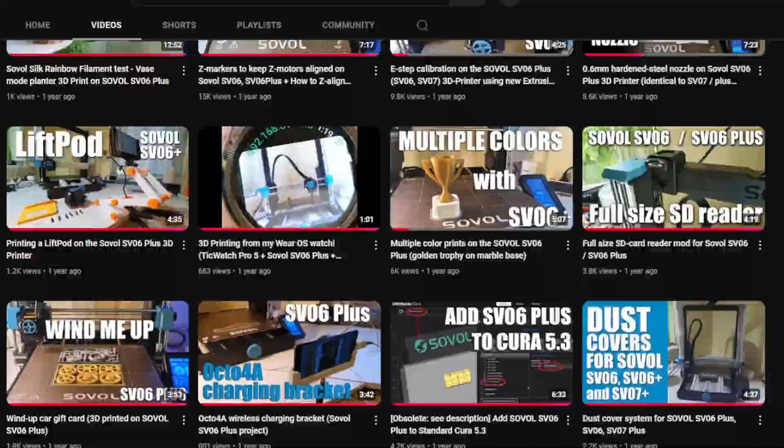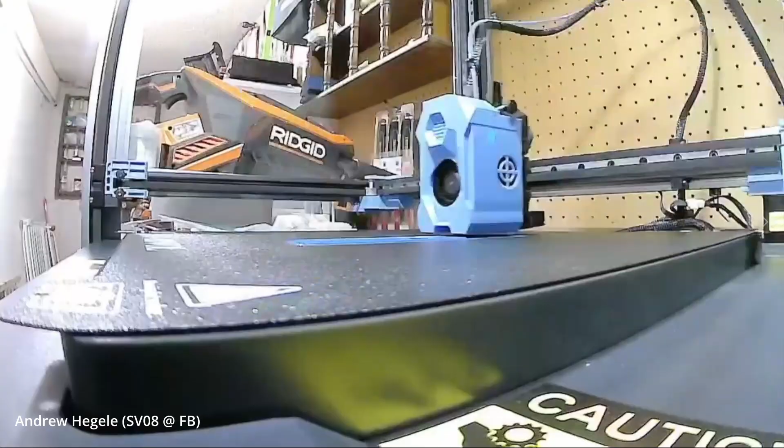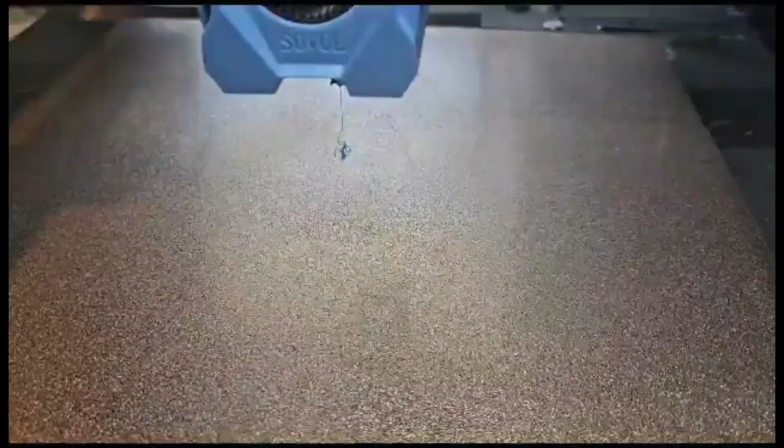Now, about the topic at hand. Recently, there have been reports of breaking nozzles on the SV08. While these seem to be isolated incidents, it's understandable to be concerned, especially if you're still waiting for your SV08 to be delivered. As far as I can recollect, the first reports of nozzle issues appeared in early mid-June.

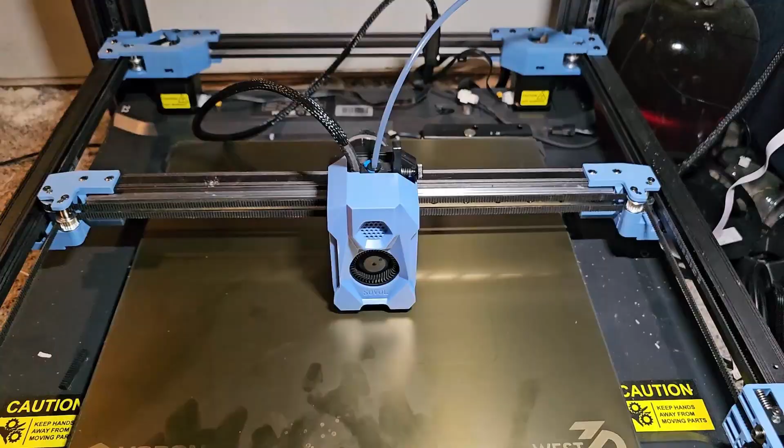From these reports, it seems, due to the pressure conditions inside the nozzle, the two parts of the press-fit SV08 nozzles came apart, separated, causing the nozzle to protrude more and eventually fall out. If this happened near the build plate in the beginning of a print, this protruding nozzle could scratch it up and ruin the PEI coating.

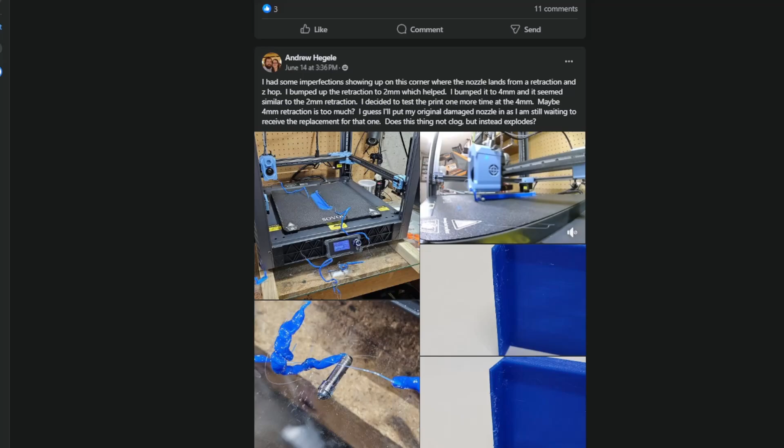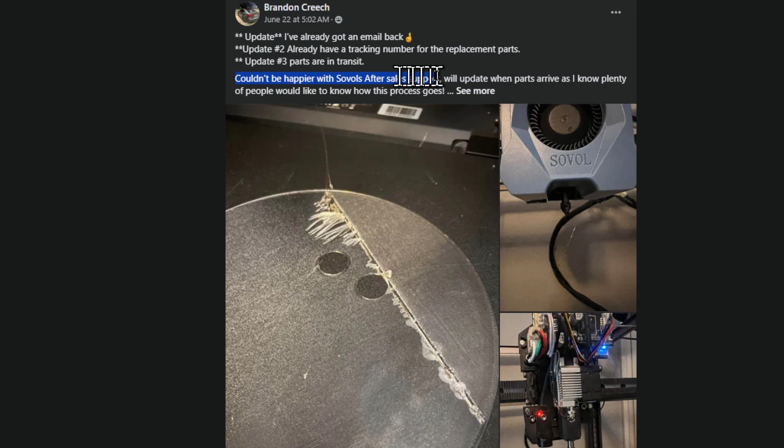The issue, understandably, gained much attention from a YouTube video showing the nozzle being pushed out. This user created several videos about the problem, but it remains the only case I found on YouTube. There were a few mentions of similar issues in the Sovol SV08 Facebook group, notably from Andrew Hegele, Sean Kelly, Brandon Creech, Levi Kovac, and Jay Sun. According to Brandon's post, Sovol responded quickly, committing to replace the damaged nozzles and beds.

Sovol quickly issued a public statement. We have received feedback on the SV08 nozzle PETG issue lately. The problem is not related to the design, but to our nozzle supplier's quality manufacturing and control. So it seems they don't plan to update the design in any way. For customers who have already encountered problems, we will reissue the nozzle for free. If the build plate gets scratched, we will also reissue the build plate for free.

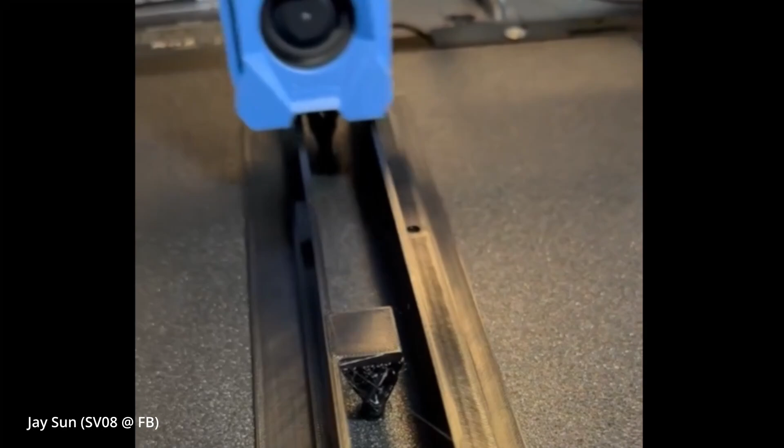So, yet another reason to wait patiently for your pre-ordered SV08. You might get a better tested, possibly updated printer if you get it a bit later rather than sooner. The common factor seems to be printing PETG. It's speculated that the higher viscosity of PETG causes some defective nozzles to separate. Some users went as far as not recommending printing PETG on the SV08 until the new batch of nozzles becomes available. However, many users still report successful PETG prints, and Darren Wynn's poll confirmed that most SV08 units are free from this defect.

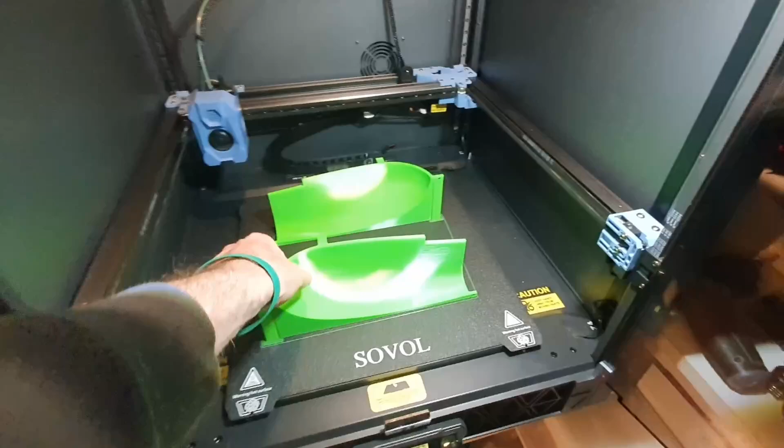PETG being my favorite material to print on all my printers, I've printed a lot of it on my SV08 too, including some more race car parts recently, a relatively large print, this time out of PETG, the top hat of the enclosure, and various other projects.

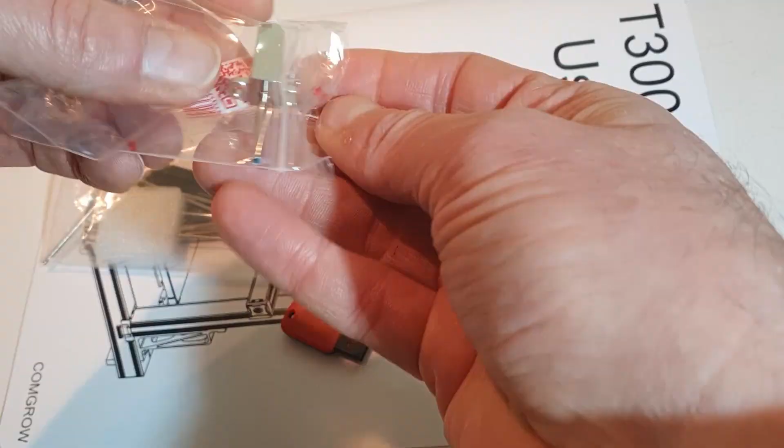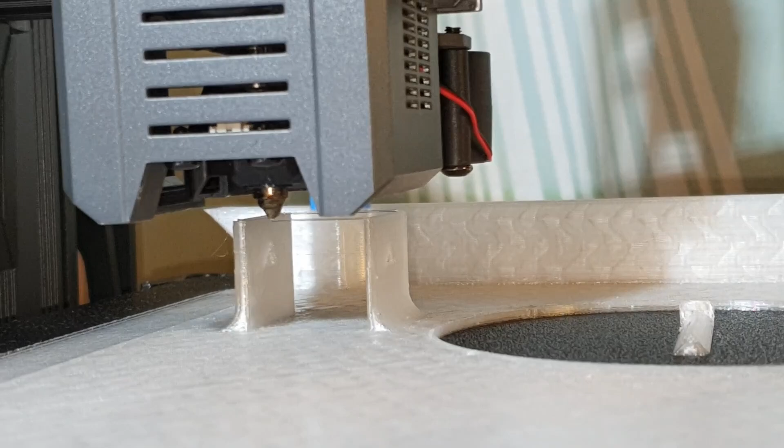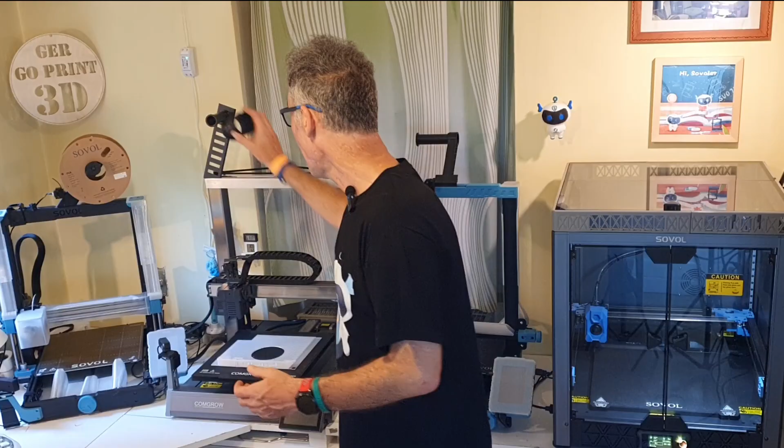The Comgrow T300, from the same company, they have merged, was the first printer to use this new nozzle. I've had it since early this year and have printed PETG parts including the bottom cover, articulated toys, and a spool holder mod I've designed to reduce friction for cardboard spools, all from PETG. The spool holder mod in particular greatly profits from being made of PETG.

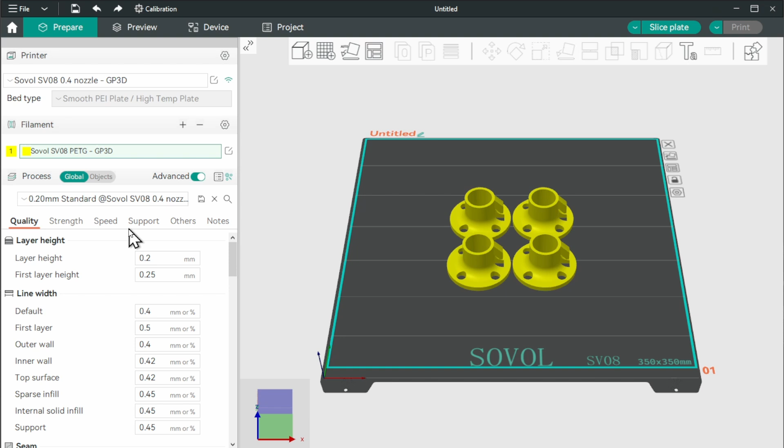So here are my presets in Orca Slicer for printing PETG on both of my printers with this nozzle. I think the key is the filament settings. I print PETG at 235 Celsius with the first layer at 240.

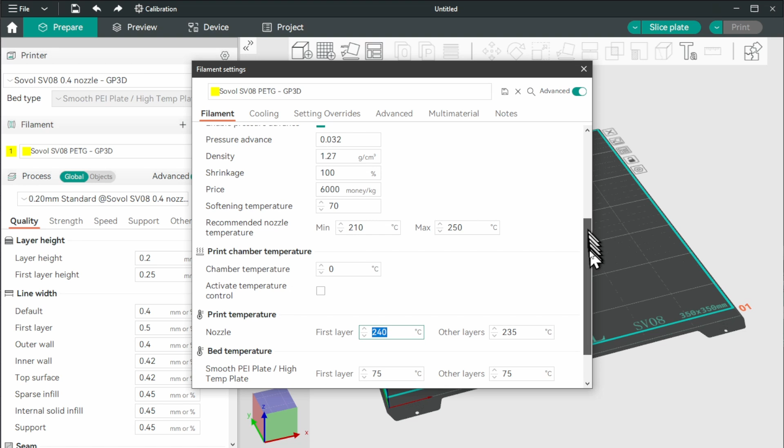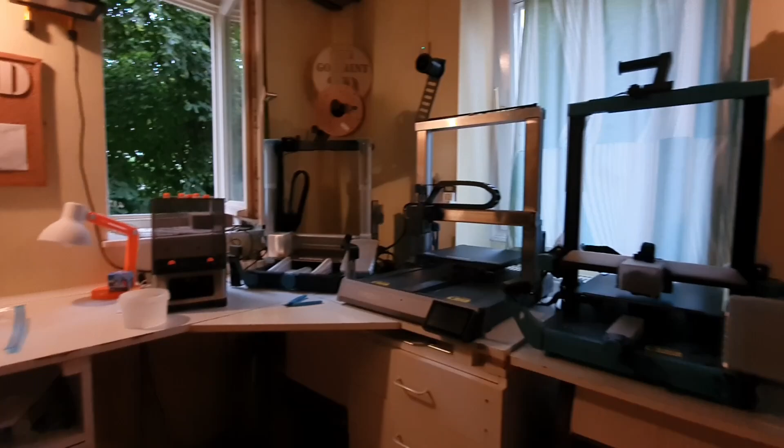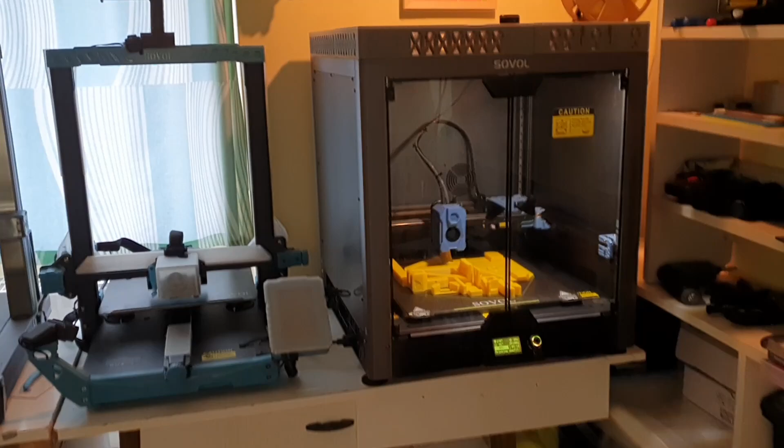I don't think, however, that the issue is related to the higher nozzle temperature. Since getting the enclosure, I've printed ABS as well, which requires significantly higher nozzle temps over 270, 280 C, and yet I haven't experienced any trouble with that either.

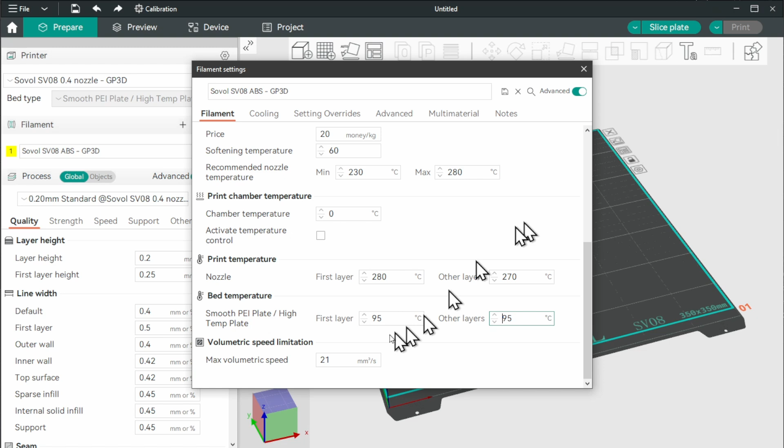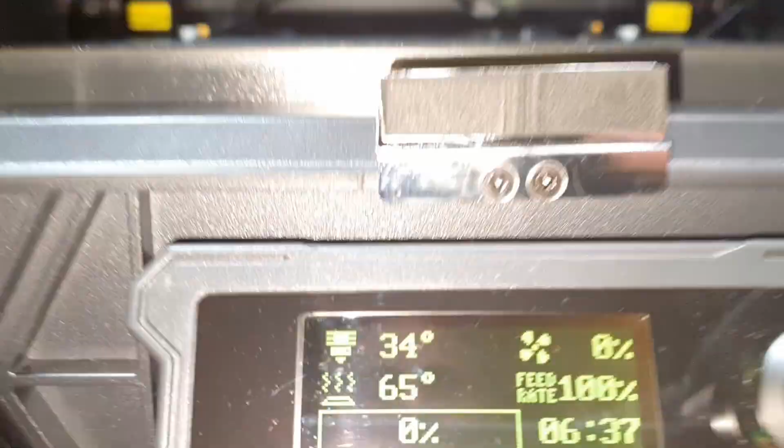I found an unrelated problem, however, with the stock Sovol presets for higher temperature filaments. These require higher bed temperatures, 75 degrees Celsius for PETG and 95 Celsius for ABS. This is a software issue. I noticed the stock start print macro still did QGL and adaptive mesh at the default 65 degrees, which doesn't make sense since print beds work differently at different temperatures. Preprint calibration procedures should always be carried out at the actual print temperatures.

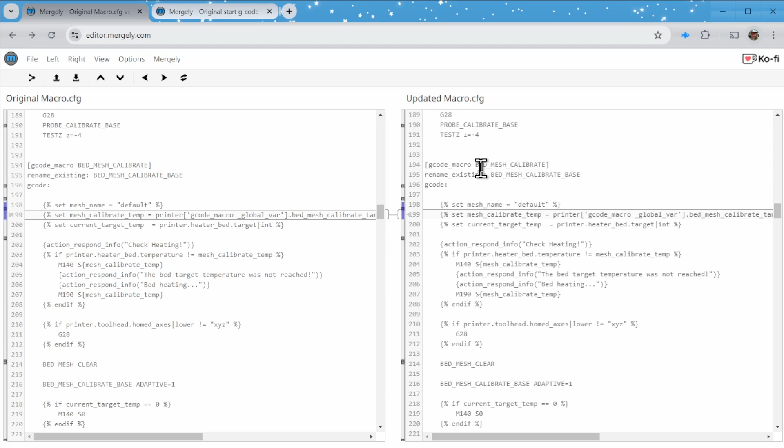To fix this, we just need to change a few lines in macro CFG, adding the condition if printer.heater_bed.target is less than 10, so it's not being heated, else printer.heater_bed.target | int. And add this condition to the macros in quad gantry level, probe calibrate, bed mesh calibrate, and start print. Here you can see I'm inserting this condition to the line setting the bed temperature. I've recommended something similar for the T300 before.

While we are at it, we can also correct the bug Åke Waldeborn pointed out in line 510 of macro CFG, where Sovol accidentally mixed up the extruder and bed temperature commands. So the fix is simply to change M140 to M104 and M190 to M109.

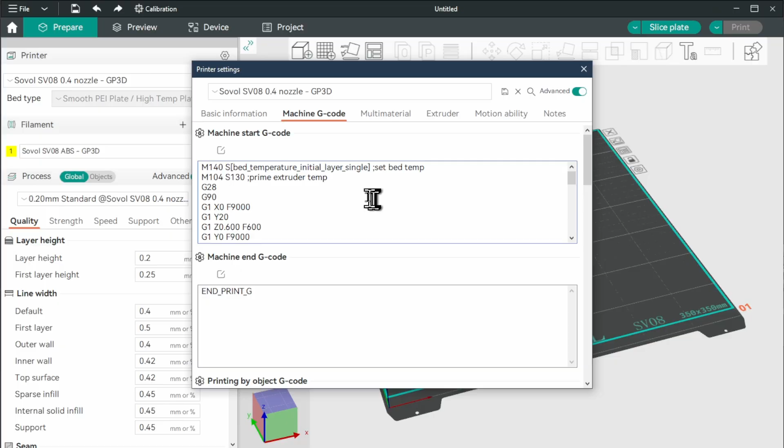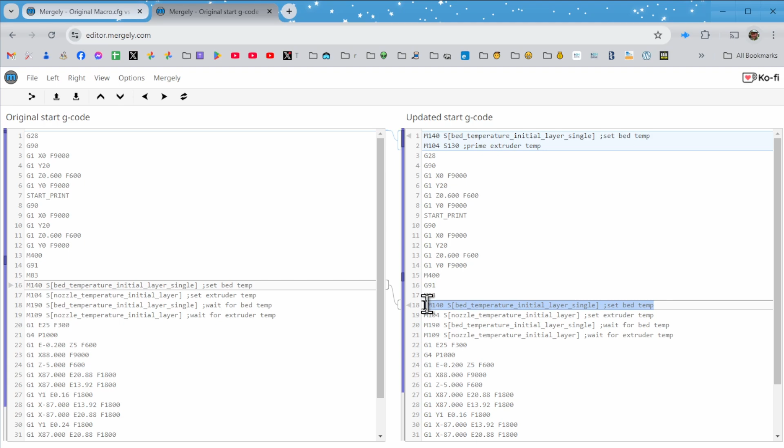For the updated bed heating macros to work correctly, we will also need to make a slight adjustment to the start G-code in Orca Slicer. Here you can see the original and the changes side by side. You'll need to move the M140 command to the beginning of the code before the macro call. The original command can be commented out below. And optionally, add an M104 command to prime the extruder just below oozing temperature. This can speed up preprint preparations by a few seconds.

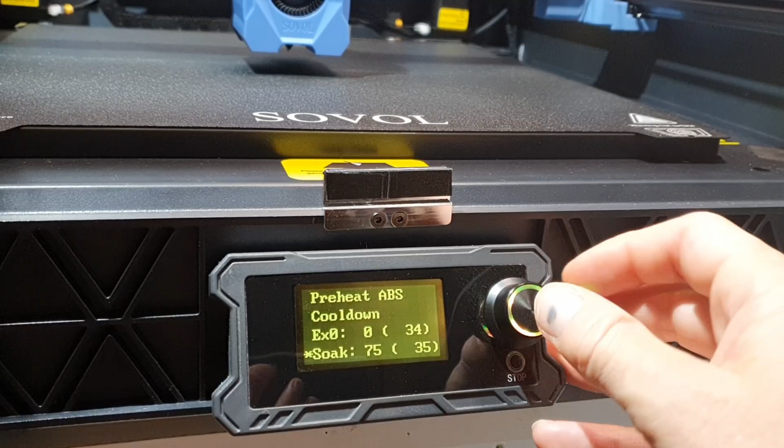For perfect first layers, I recommend heat soaking at or slightly higher than your print bed temperature for a few minutes before your print, using my handy macro from previous videos.

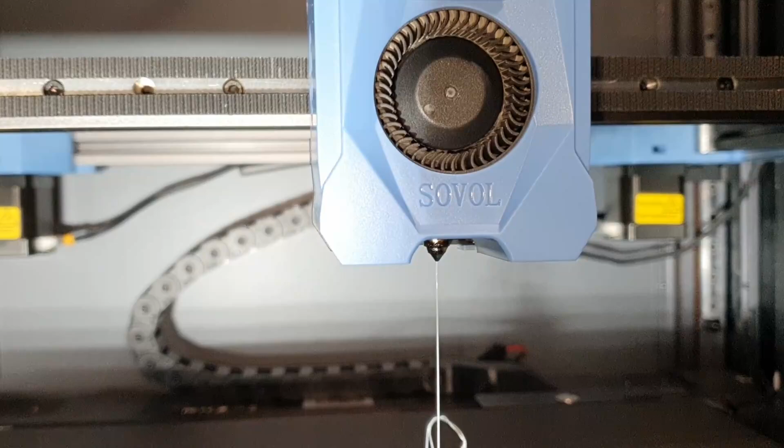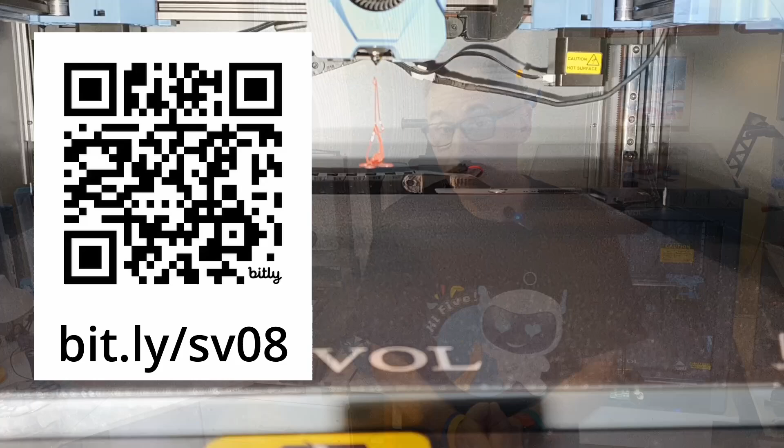In summary, I don't see any reason not to print PETG with the SV08. The issue seems to affect only a very few members of our user community who understandably posted excessively about it. So there is a lot of discussion, but be aware of negativity bias. It's more likely for someone with a problem to post about it, while others having a great experience don't. If the problem affects your printer, it's best to address it quickly, in my opinion. Sovol seems to be committed to resolving these cases promptly. I recommend carrying out my modifications in macro CFG, however, and always calibrating your filaments, including PETG.